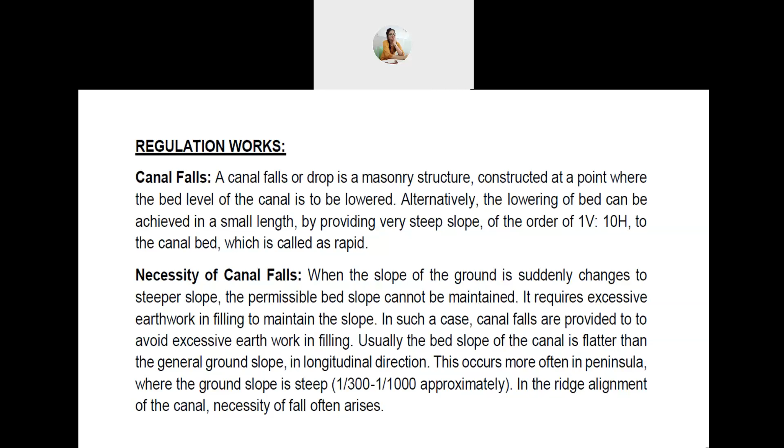Next, location of canal falls. On the downstream of the point where the canal bed level and ground level are equal, the bed will be banking, so the height of the banking keeps increasing. A canal bank higher than 2 meters poses problems like heavy seepage, settlement, cracks, etc. Hence it is necessary to lower the bed, which is achieved by the canal falls.

Economical and safe location of the canal fall is between the vertical drop to the design slope. A fall can easily be combined with a cross regulator or a road bridge. If there is a takeoff point nearby, the likely site of the fall should be located downstream of the takeoff and combined with a cross regulator. Here you can see the location of a canal fall having a vertical drop on the available ground slope, with the designed slope also shown above it.

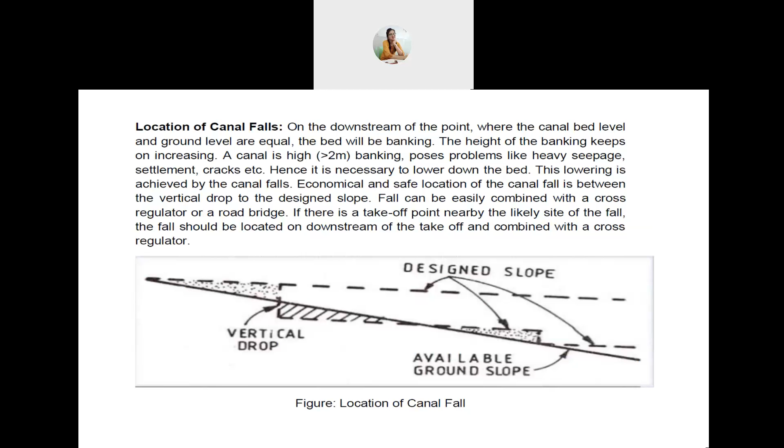Various types of canal falls. Falls are classified on different bases: number 1, controlling upstream water level, in 3 classes - falls that maintain normal depth discharge relationship, fixed upstream water level, and variable upstream water level. Number B, important shape characteristics - vertical drop, glacis, and stepped. Number C, others - well, chute or rapid, flumed or non-flumed, metering or non-metering.

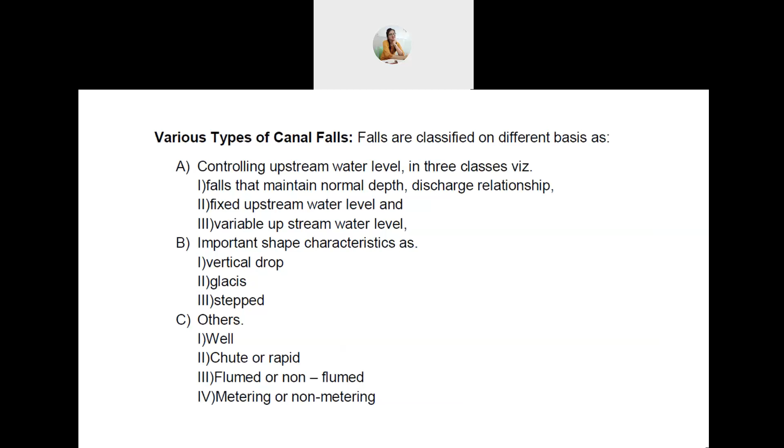Next, regulators. Canal regulation works are structures constructed to regulate one or more canal parameters like discharge, velocity, etc. There are a total of 7 types of regulators. The first is a head regulator, used to regulate discharge entering from one canal into another, along with the proportional quantity of silt.

Number 2, cross regulator, used to maintain necessary depth on its upstream irrespective of the discharge flowing in the canal, so that the taking-off canal can draw its full supply discharge, or close the canal downstream. Number 3, falls, used to regulate the bed gradient and hence the velocity of flow. Number 4, escapes, to divert the entire canal discharge to waste when the canal downstream is to be closed.

Number 5, outlets, to regulate discharge entering a farm. Number 6, silt ejector, to eject silt that has entered a canal from the diversion weir headworks. Number 7, silt excluders, used to exclude silt coming along with the river flow before the discharge is diverted into the head regulator and hence into the canal in a diversion headwork.

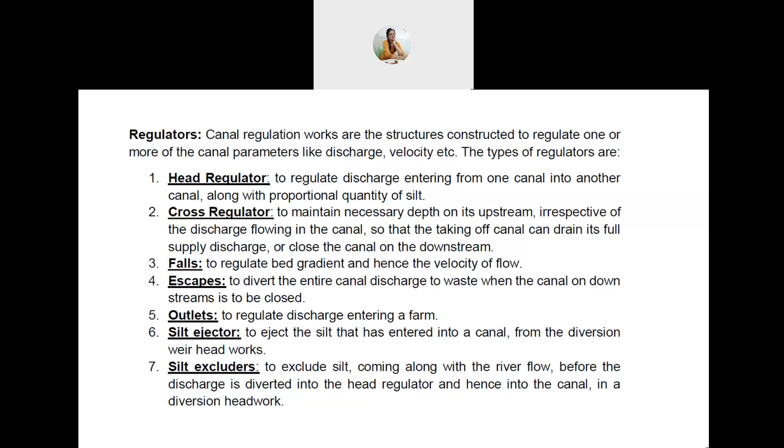For the case of regulators and diversion headworks, I've already shown you 2 to 3 videos, or more. So you can go back to those videos if you want to relate to any of this.

Next, silt control devices. The 3 components employed for silt control at the headworks are scouring sluices or under sluices, silt pocket, and silt excluders.

Next is canal outlet. A canal outlet is like a head regulator for a field course or water course. Through the outlet, water from the canal, that is the distributary or minor, enters into the field course. The water course is a canal owned and maintained by the village irrigation panchayat, an organization, or by individual farmers. The discharge of an outlet is less than 0.085 cumecs.

The functions of outlets are to allow required discharge into the fields, to regulate the discharge according to water level in the parent canal, and to measure the discharge passing out through an outlet.

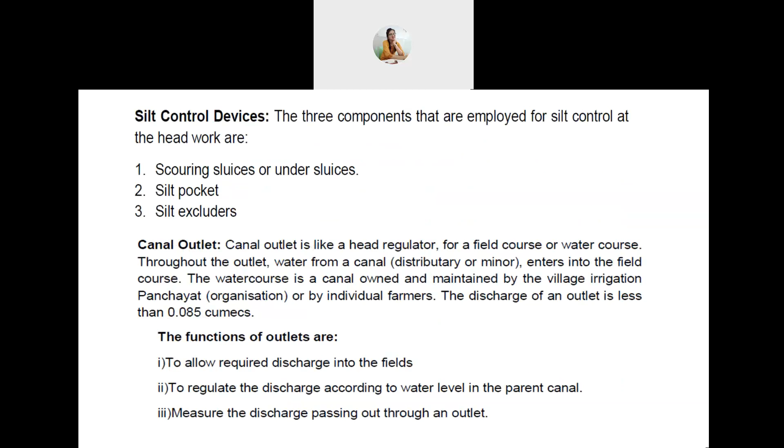According to IS 7986/1976, outlet structures should satisfy the following requirements. First, it should be strong and simple with minimum or no moving parts that require continuous maintenance. Number B, it should be tamper-proof. Number C, the cost should be minimum.

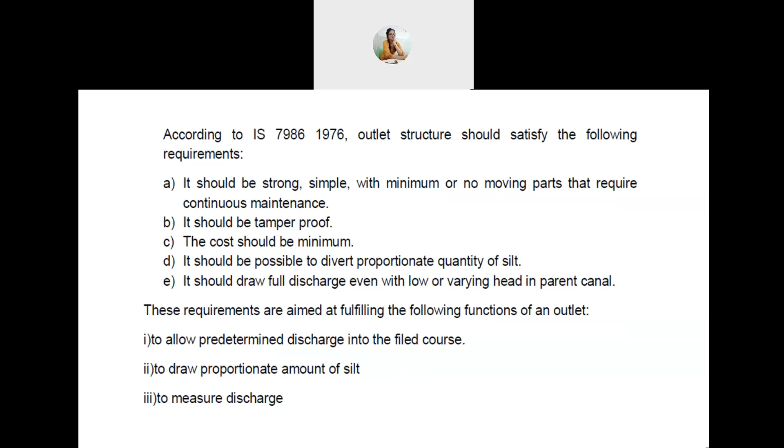Number 4, it should be possible to divert a proportionate quantity of silt. Number 5, it should draw full discharge even with low or varying head in the parent canal. These requirements are aimed at fulfilling the following functions of an outlet: one, to allow predetermined discharge into the field course; two, to draw a proportionate amount of silt; and three, to measure discharge.

Next, location of canal outlet. Irrigation outlets are located on distributaries, sub-distributaries, and minors. An outlet is not located or permitted on large capacity canals or canals kept charged throughout a season, like main canals and branches. The outlet is located at a point where the ridge crosses the parent canal. It is preferable to locate the outlet upstream of a fall.

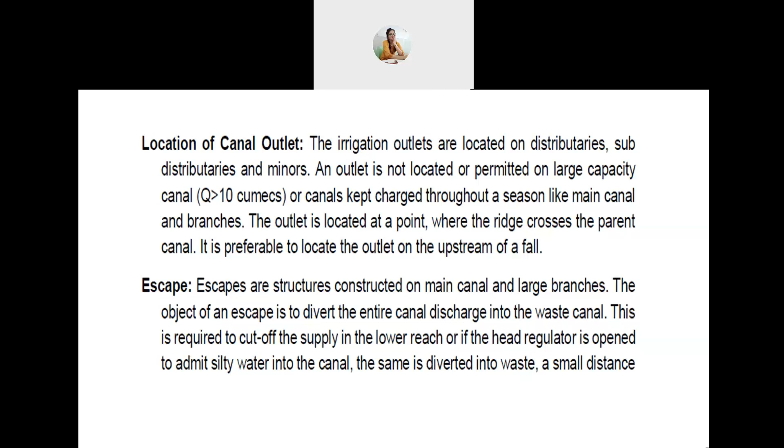Next, escapes. Escapes are structures constructed on the main canal and large branches. The object of an escape is to divert the entire canal discharge into the waste canal. This is required to cut off the supply in the lower reach, or if the head regulator is open and admits silty water into the canal, the same is diverted into waste a small distance away from the dam. An escape is located on one bank of the canal, just upstream of the cross regulator and near a cross drainage work.

Escapes are of three types: number 1 is surplus escape, number 2 is tail escape, and number 3 is scouring escape. First, surplus escape, also called the regulator type. In this type, the sill of the escape is kept at canal bed level and the flow is controlled by a gate. This type of escape is mostly preferred nowadays as it gives better control and can be employed for canal maintenance.

Next, tail escape. It is provided at the tail end of the canal and is useful in maintaining the required full supply level, FSL, in the tail reaches of the canal, hence it is called tail escape. Next, scouring escape. This escape is constructed for the purpose of scouring excess silt deposit in the head reaches from time to time, hence it is called scouring escape.

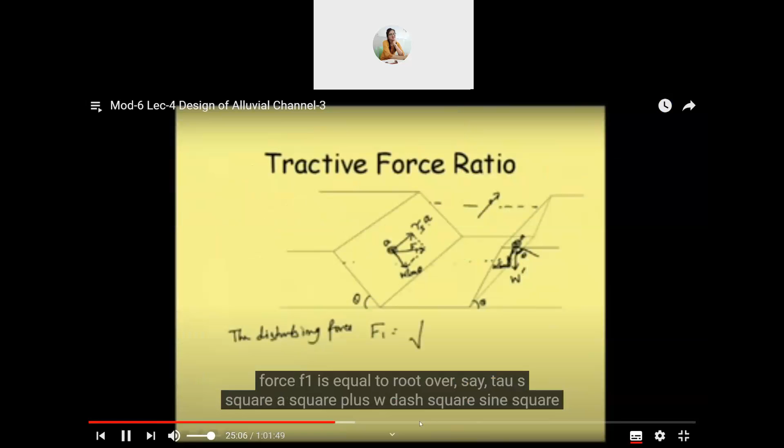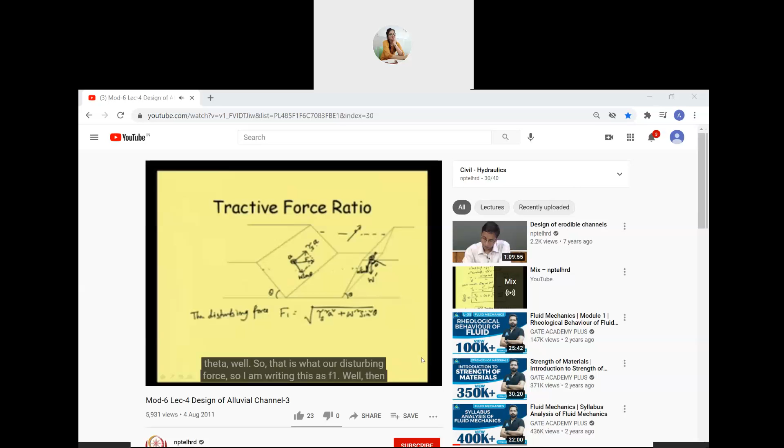Is equal to root over, say, tau s squared a squared plus w dash squared sine squared theta. Well, so that is what our disturbing force is. So I'm writing this as F1. Then when there is a disturbing force, if the particle is not moving, there is also a resisting force.

And at the time of just incipient motion condition, these two forces are equal. What we mean by incipient motion condition is that the particles are just in the verge of motion, just about to move. So at that point, the disturbing force is just equal to the resisting force.

And our interest is to find out the permissible stress. Up to that point, when our particles are not moving, our channel design is fine. So we are talking about that situation. Of course, our permissible force may be a little less than this particular force, but when it is just in the verge of motion, we can call that the critical condition. The permissible condition should not be the critical condition; it should be a little less than that.

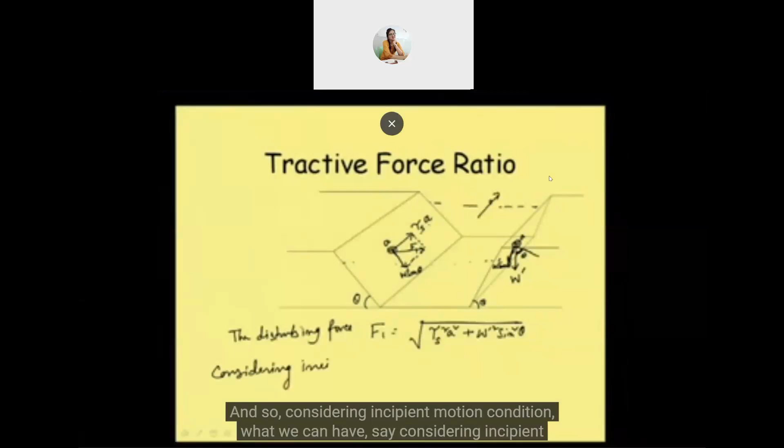But anyway, let us see what is the expression for this critical condition, considering the incipient motion condition. We did discuss incipient motion condition earlier also.

That will equate to the resistance force. First we find out the disturbing force, then the resisting force. Considering incipient motion condition, the resisting force, as we know, comes from the frictional resistance here, and the cohesion part we are not counting at this point.

So for resisting force, because we are talking about an alluvial channel, this resisting force will be proportional to the force exerted increasing; proportionally the frictional resistance increases, and of course beyond a particular limit it cannot increase further, and that is the limiting condition. So at incipient motion condition, this will be at its maximum.

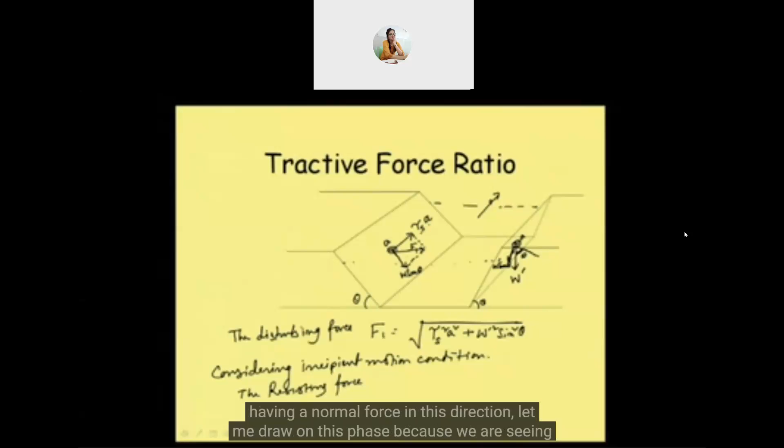What we can see is, suppose this is the bed, this is not the bed, this is the side; then this will be opposing this motion, and the frictional force opposing this particular disturbing force will be the normal weight or normal reaction, so this will have a normal force in this direction. Let me draw this on the face since we are seeing it from the back side. That is fine, we can see it. So in the normal direction, what will be the component?

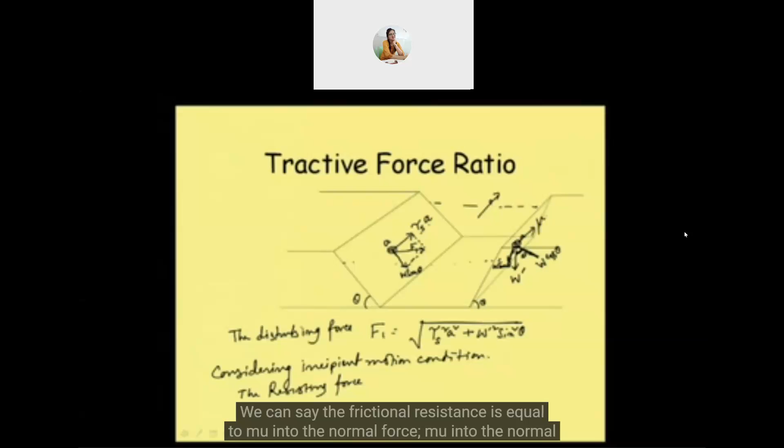This is W cos theta. As we know, the frictional resistance will be in any direction. We can say the frictional resistance is equal to mu into the normal force. So that normal force is cos theta. Weight is this one, so reaction will be like that, and then it is mu into cos theta. This mu cos theta is basically opposing these forces. Now I'm not drawing exactly the direction here, but we can say that this is say mu cos theta.

Now what is mu? That is, again, we need to refer to the frictional property of the soil. But let me write here as mu cos theta. Here itself I am showing on this face, it is easy to show, and here just I am drawing it because we cannot see the back side from this side, that's why I am drawing it here. So this is equal to mu cos theta. Resisting force F2, if I write, this is equal to mu cos theta.

Now, if angle of internal friction of the soil is say phi, then what mu is, that we all know is nothing but tan phi. If the angle of internal friction is phi, then it is tan phi. So we can write that, this is not cos theta, this is W cos theta. This I did a mistake in writing here. This is not cos theta, this is W dash cos theta. Again, dash is always coming, W dash cos theta.

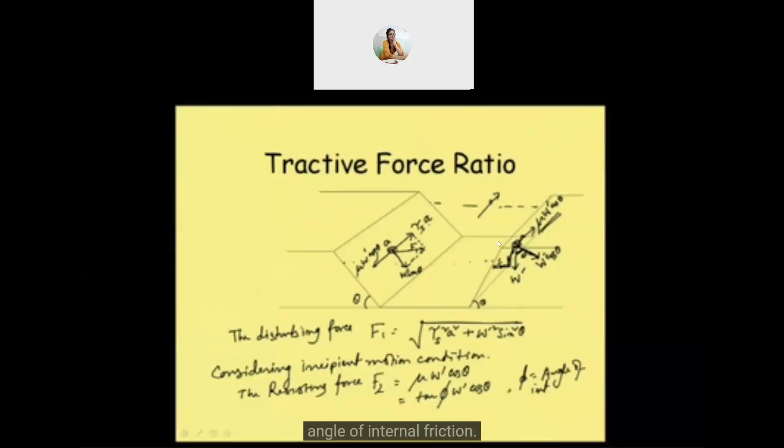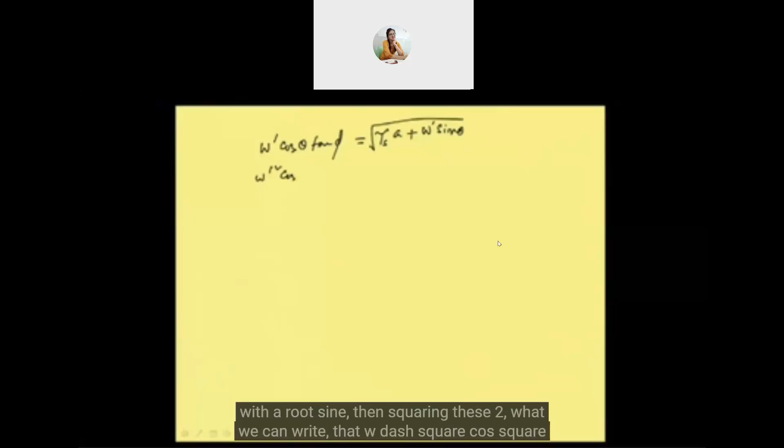So now for incipient motion condition, we can equate these two. Equating these two, what we can write, that W dash cos theta and tan of phi. This is the resisting force, and the other one is say tau S A plus W dash sine theta, with a root sign. Then squaring these two, what we can write, that W dash square cos square theta tan square phi is equal to tau S A.

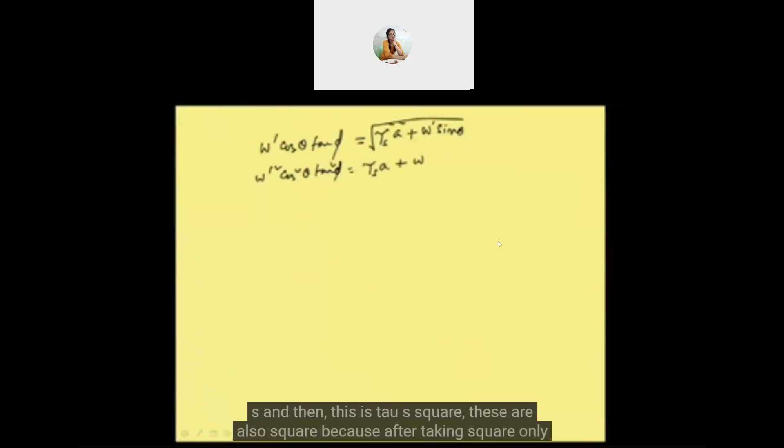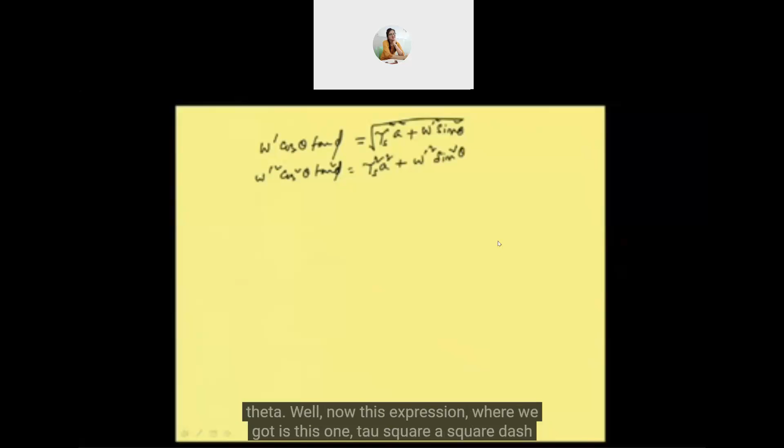Our target is to separate this tau S, and then this is the tau S square. These were also square because after taking square only we were taking the root. So it will be tau square A square W dash square sine square theta. Now this expression we got is this one, tau square A square W dash square sine square theta. We are writing the same expression here.

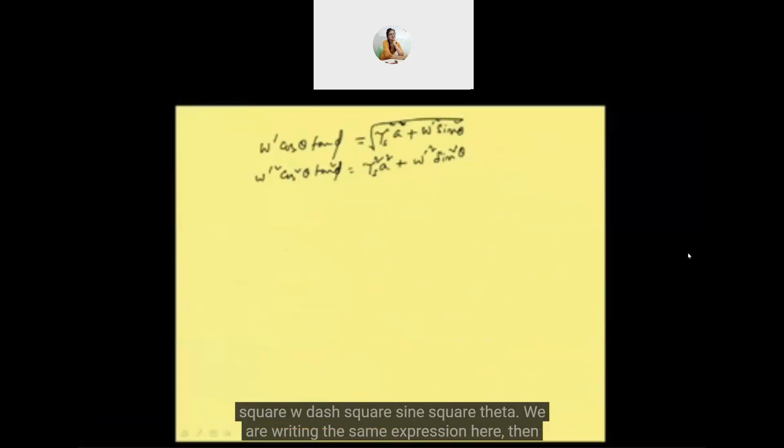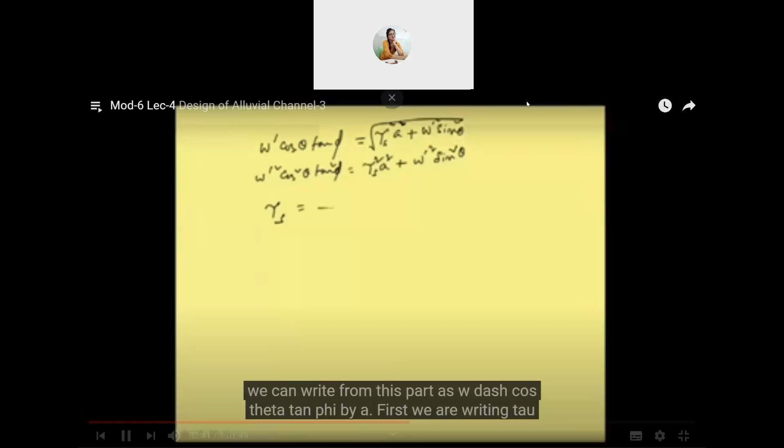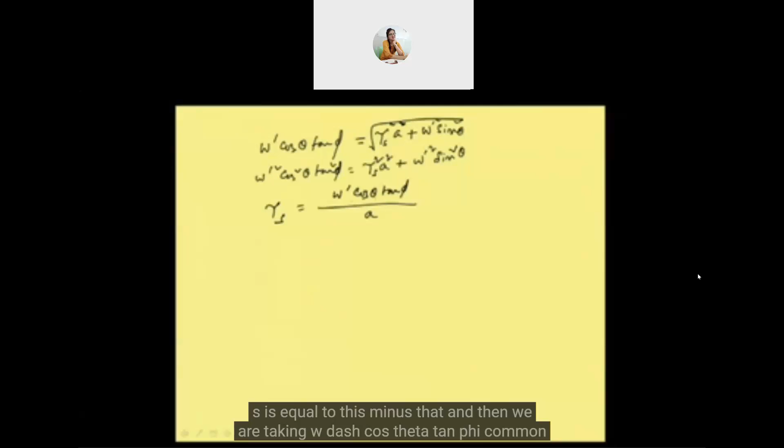Then from here what we can write, that tau s, that is the side tractive stress, we can write from this part as W dash cos theta tan phi by A. First we are writing tau s is equal to this minus that, and then we are taking W dash cos theta tan phi common, and then of course we are taking root, and then if we take the other part here, then it becomes 1 minus tan square theta by tan square phi.

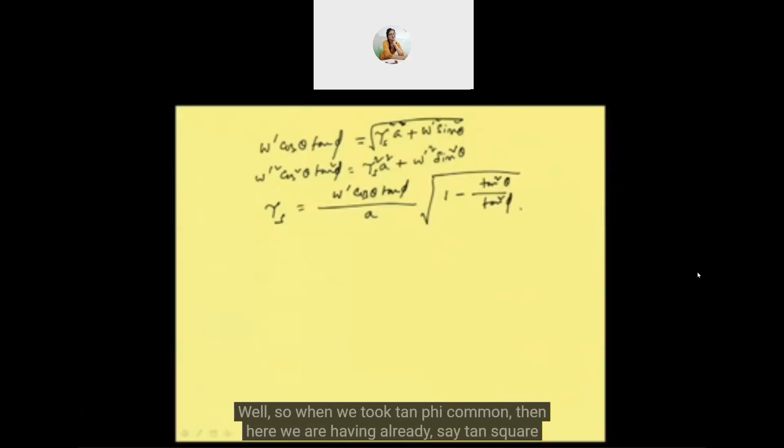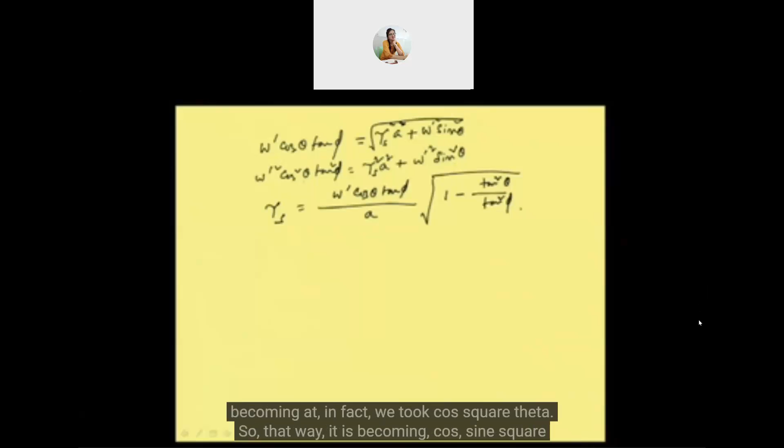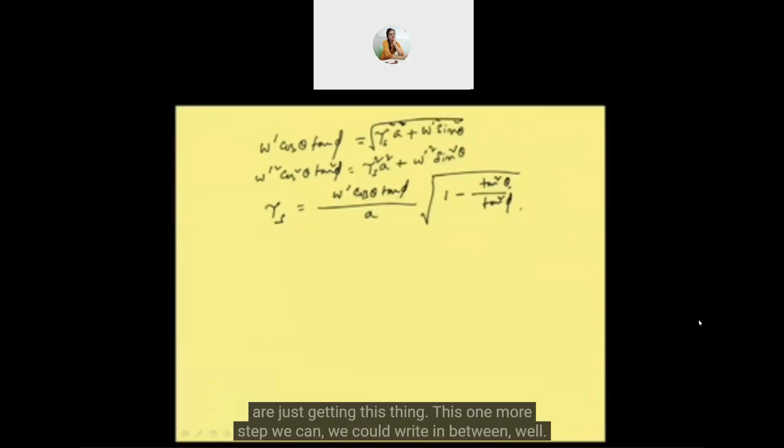Well, so when we took tan phi common, then here we are having already, say, tan square phi coming here, and then it becomes, and we are taking cos theta common, so it is becoming, in fact we took cos square theta, so that way it is becoming cos sine square theta by cos square theta, so this tan square theta is coming, and then later when we took root over, this cos square theta becomes cos theta, tan square phi becomes tan phi, and all are just getting this. Just one more step we could write in between. So that way we are getting this tau s, the side tractive force. We are getting an expression.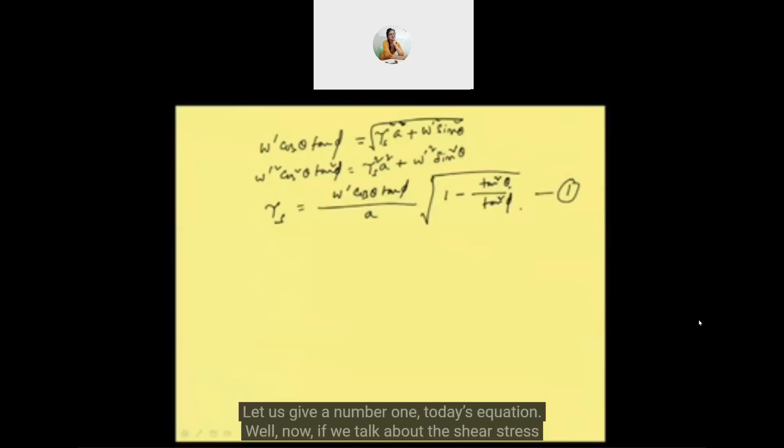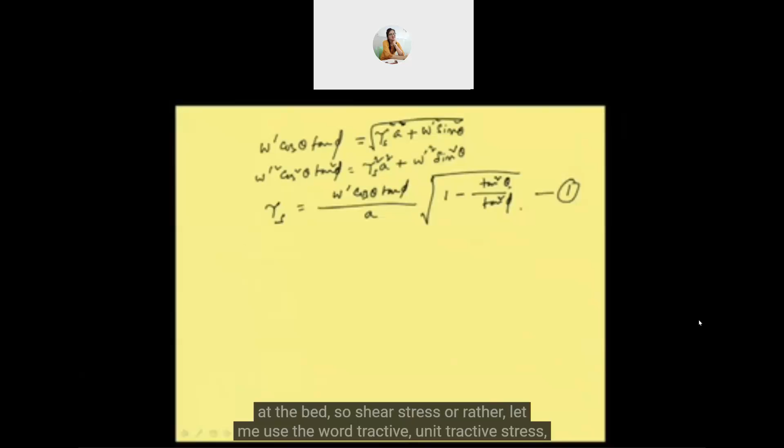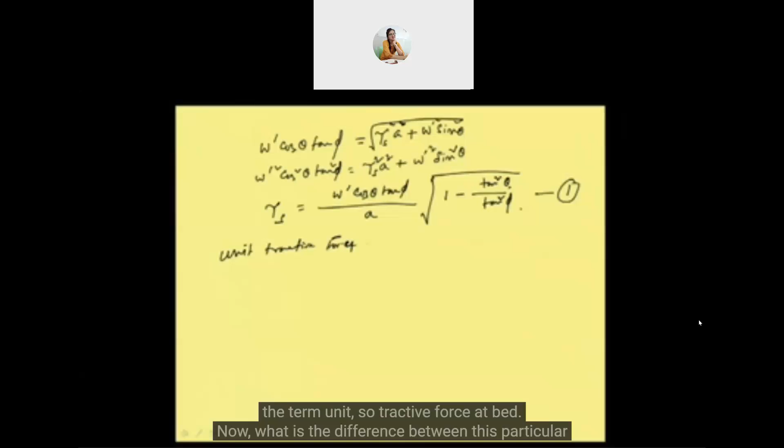Let us give a number 1 to this equation. Now if we talk about the shear stress at the bed, so shear stress, or rather let me use the word tractive, unit tractive stress, unit tractive stress or tractive force, unit tractive force, because already we are using the term unit. So tractive force at bed. Now what is the difference between this particular expression in bed and side?

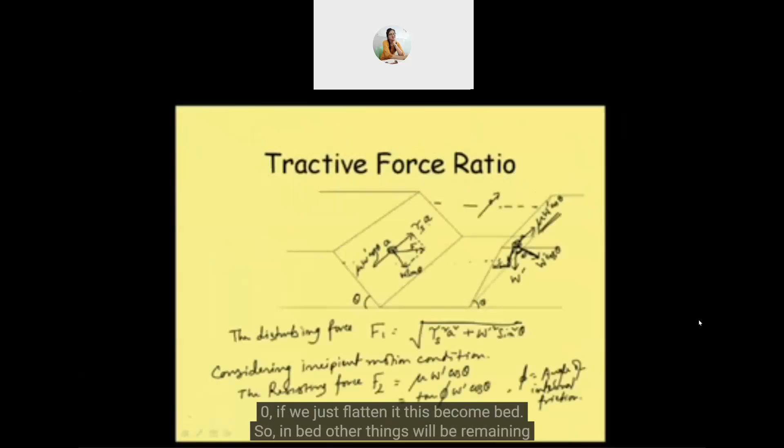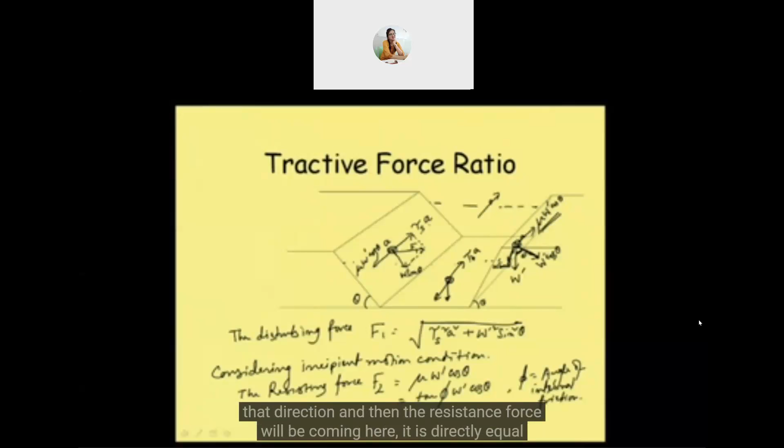If we talk about bed, then our theta for the bed is becoming 0. If we just flatten it, this becomes bed. So in bed, other things will be remaining same. This force will be there, the reaction force will be there, but here if we take a bed, same area, then this force will be there, and this is tau b into a, then weight component will be directly vertical, so there will be no component in that direction, and then the resistance force will be coming here. It is directly equal to W. Means basically if we make theta equal to 0, then we get the expression for bed.